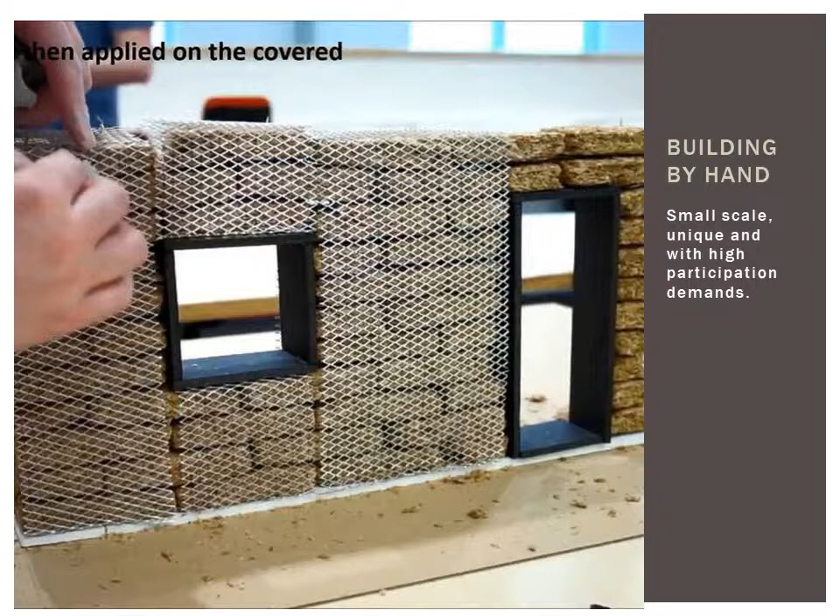Most building in California and in the United States is small custom straw bale homes built by hand. This takes place on a small scale. The buildings are usually unique and with high participation demands from both the owners and the builders. This limits the possibility of spreading straw building into the mainstream market.

One of the big advantages of straw bale construction is that it sequesters a great deal of carbon. It's non-toxic and is thermally quite good, so you get energy efficiency as well as sequestered carbon. So we started looking for new ways to build with straw that would lower the price, gain acceptance with the conventional construction community, and kind of allow us to move into the traditional housing market as well as doing commercial construction.

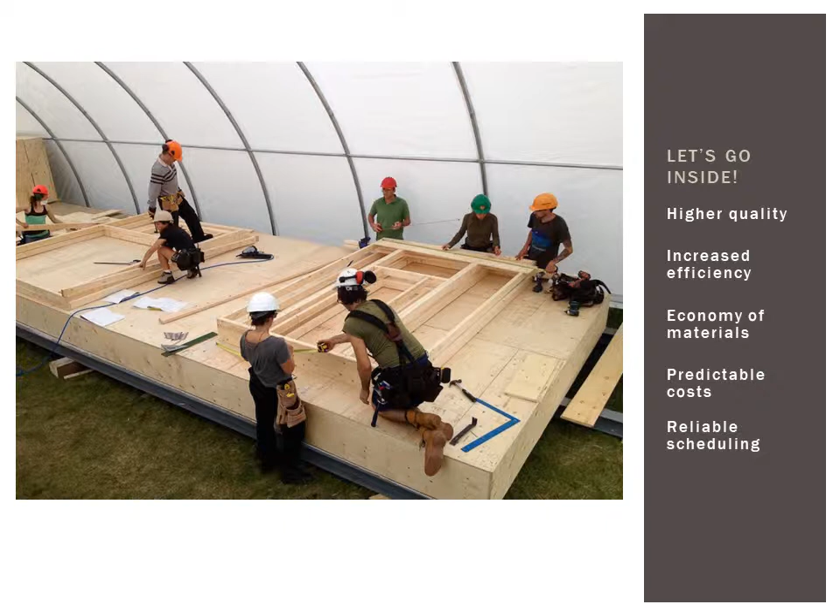Prefabricated building generally results in a lower cost and a consistent higher quality than building unique buildings on site. So he thought, well, let's go inside and build inside. You get higher quality, more efficiency, an economy of materials because you can stack larger quantities of materials and use them over and over again. You can zero in on what the costs are, and because your scheduling is not subject to the demands on the site, including weather, you can have more reliable scheduling.

In addition, the panels can be constructed while the foundation of a project is being put in so that they're all ready for installation as soon as the foundation is ready for them. Chris Magwood up in Canada at the Endeavour Center has used a process that for owner builders is particularly good because it eliminates the need for skilled plastering.

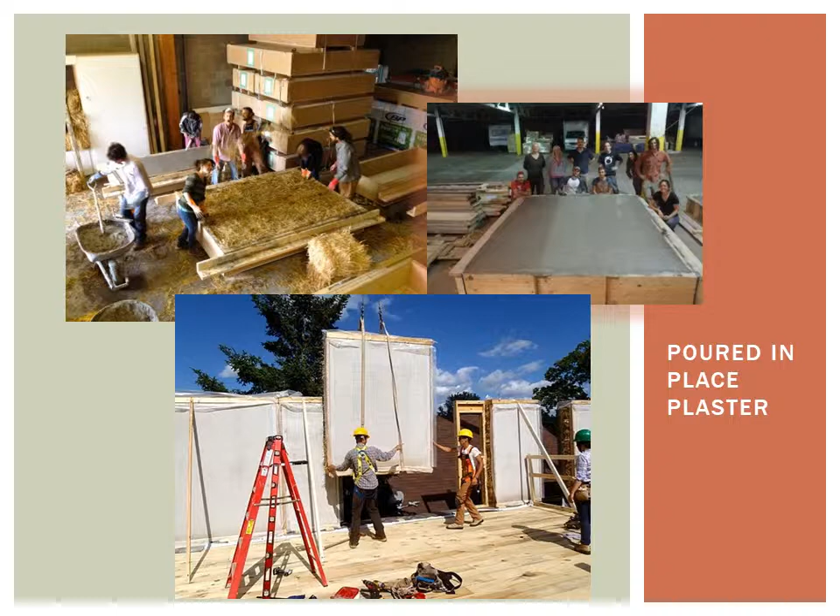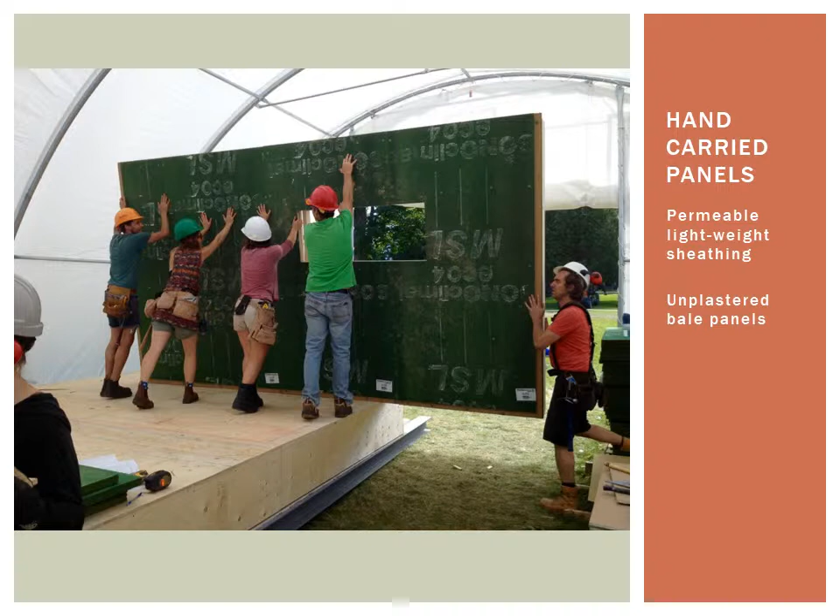In this situation, the bale panels are made and then plaster is floated on top of them and screeded out flat. So it's more like pouring a slab than it is traditional plastering. This, of course, results in pretty heavy panels which have to be lifted in place. The Endeavour Center has also experimented with lighter panels that can be hand placed and moved around on site. Chris Magwood has written an excellent book, Prefab Straw Bale Construction, that goes through a variety of small-scale panel construction methods.

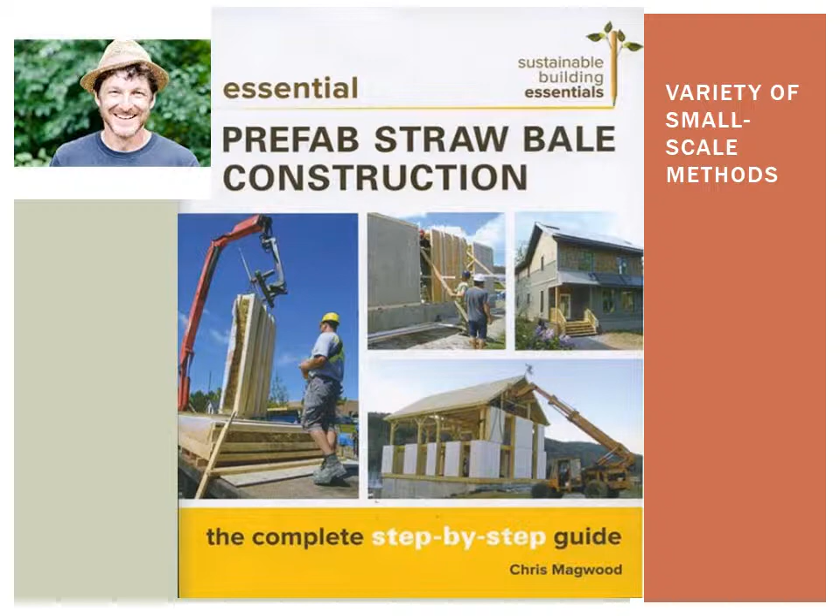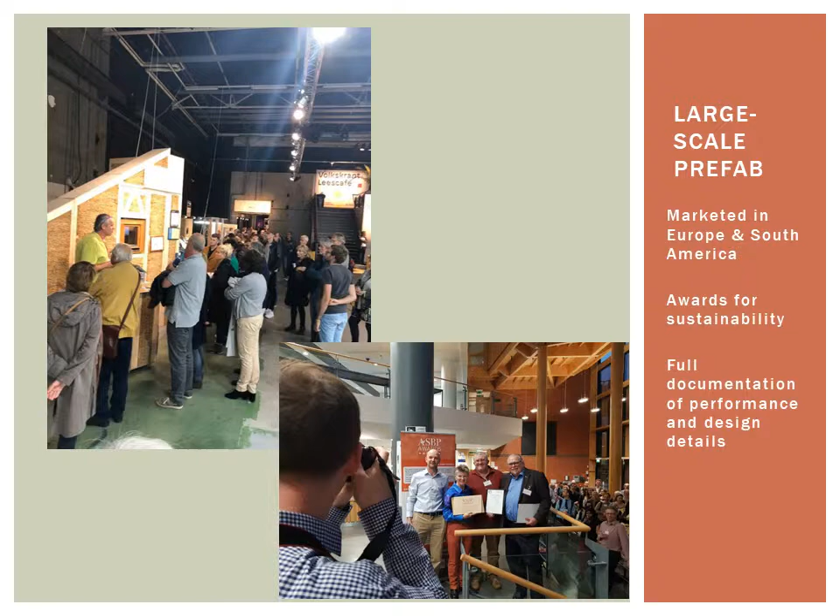In Europe, there are 3 or 4 companies doing large-scale prefab. The first one we're going to discuss is a company called EcoCocon, which is based in Lithuania. They've marketed very successfully all over Europe, and they've won a lot of different awards for environmental and sustainable building. One of their main features is that an architect can submit plans and they will create full documentation, designs with all of the details, and out the other end comes the panel placed.

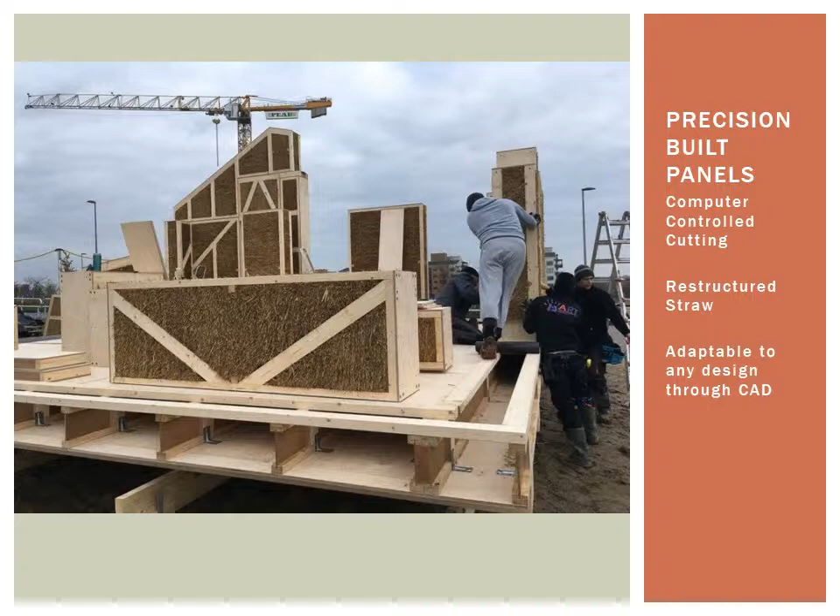They use computer-controlled cutting for their panels, as does ModCell that we'll discuss later, and stuff the panels not with bales, but with kind of loose and restructured straw. With the computer-controlled cutting, the panels themselves can be any shape and are easily varied according to plan. So essentially, you have kit building. They ship packages internationally all over Europe, particularly Germany and Scandinavia. And their structures can be put together by a couple of guys. Most of the panels are small enough that they can be lifted in place, and of course they're not plastered.

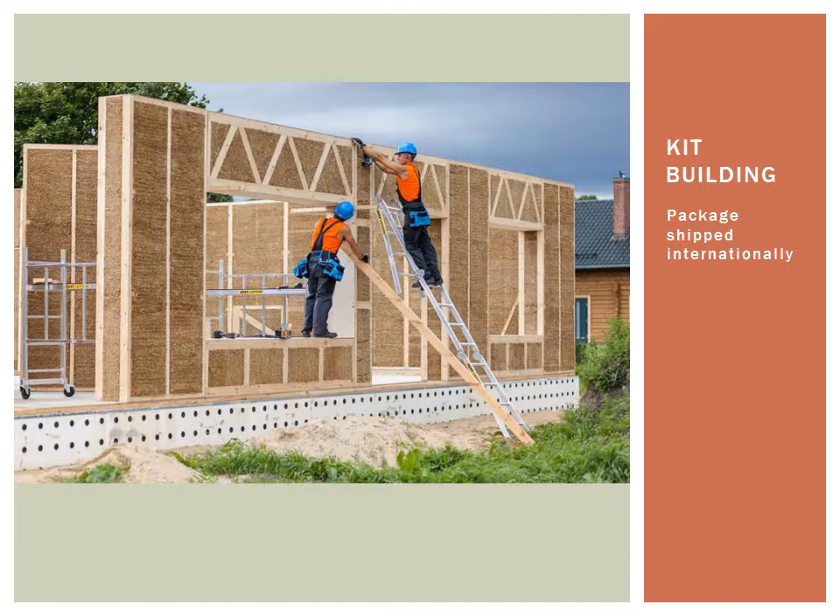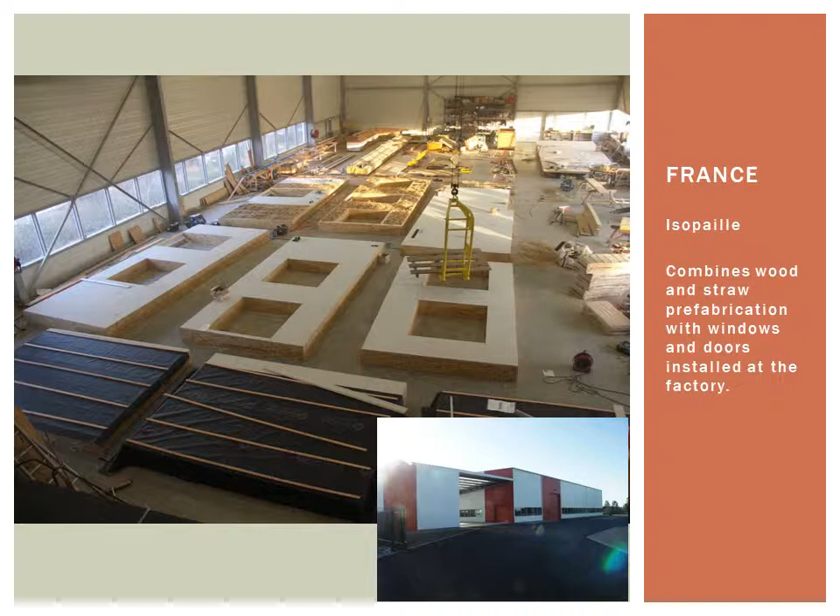There's also a company in France that does panel building, and they combine a lot of wood and straw prefabrication. They put their windows and doors into the panels at the factory.

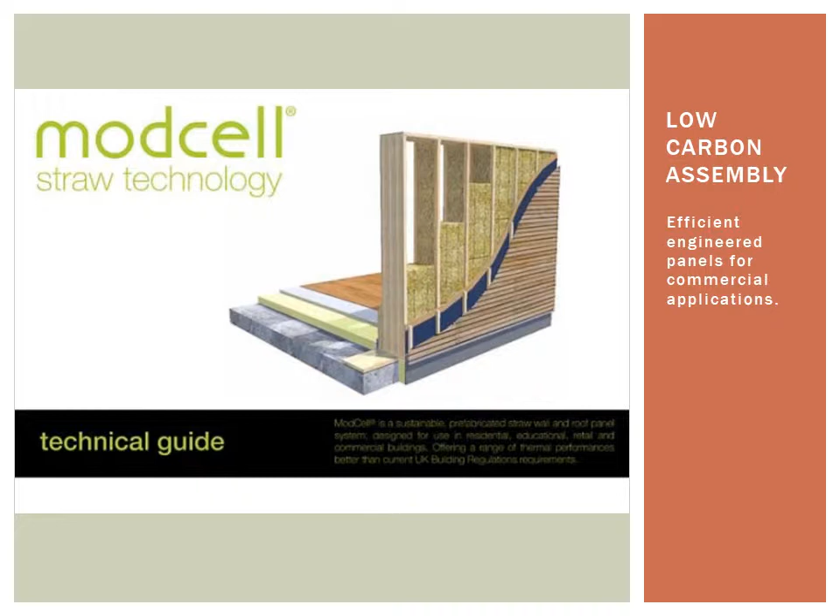ModCell is a company in England who have focused very heavily on carbon sequestration. They have very efficiently engineered panels, and they do a lot of commercial applications, some smaller homes and infill systems as well. They've done a lot of research in how to create a panel that will tie up as much carbon as possible.

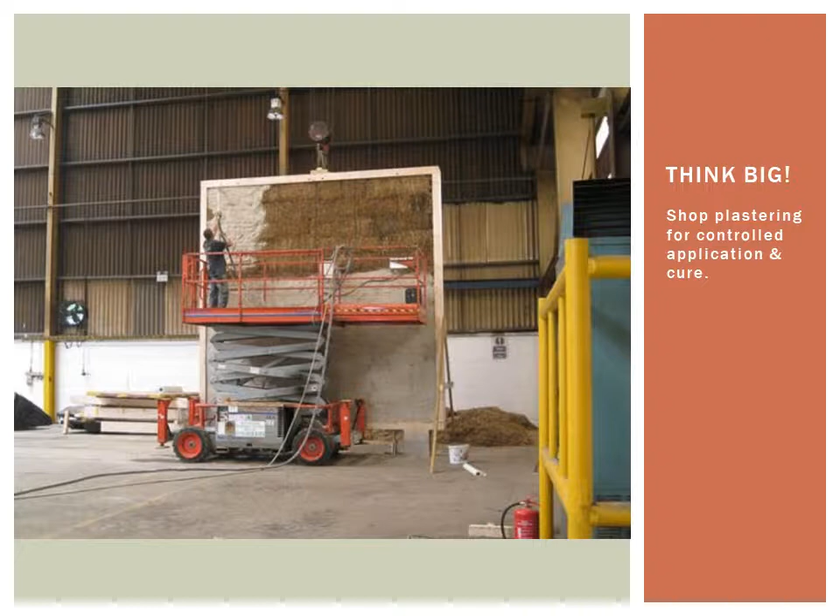They often do very large panels. This is a large panel being plastered in the warehouse. Pre-plastering the panels allows you to apply the plaster in very controlled conditions, application and cure. There are reasons we haven't done this in California that I'll get into later. The panels are put on a truck and brought to the site to be hoisted into place.

They also have what they call flying factories, where they set up a factory near a job. For instance, they did a girls' school. They had a factory near the site where the school was going to be, and the girls got time off of school to come and work in stuffing straw into the panels of their own school.

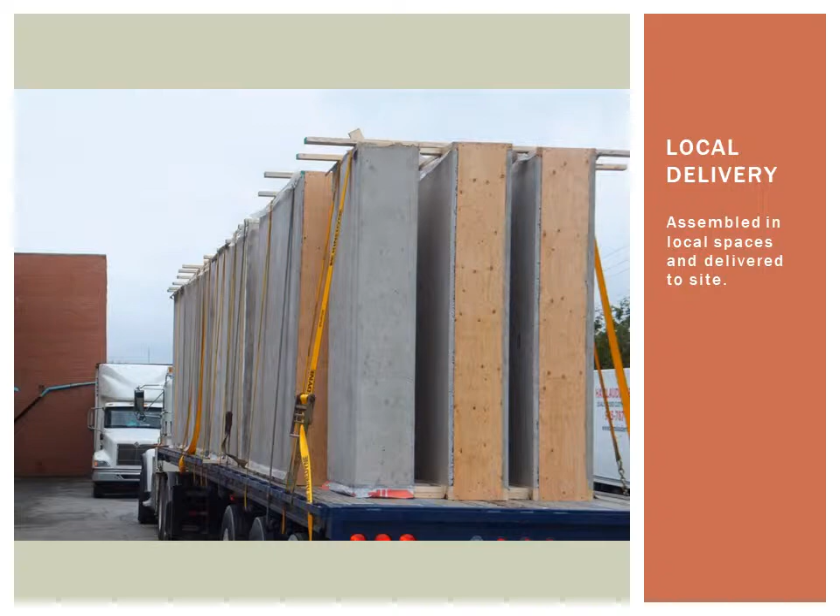Here are a variety of things that they've done. They've done co-housing buildings where they can take advantage of the economy of scale, the guaranteed cost, and also the commitment to sustainable construction. This could also work, for instance, for low-cost housing. Here's a community center done out of straw panels. They do a fair amount of wood siding and so forth. They're not subject to wildfires, most of the places where they are, and wood also sequesters carbon.

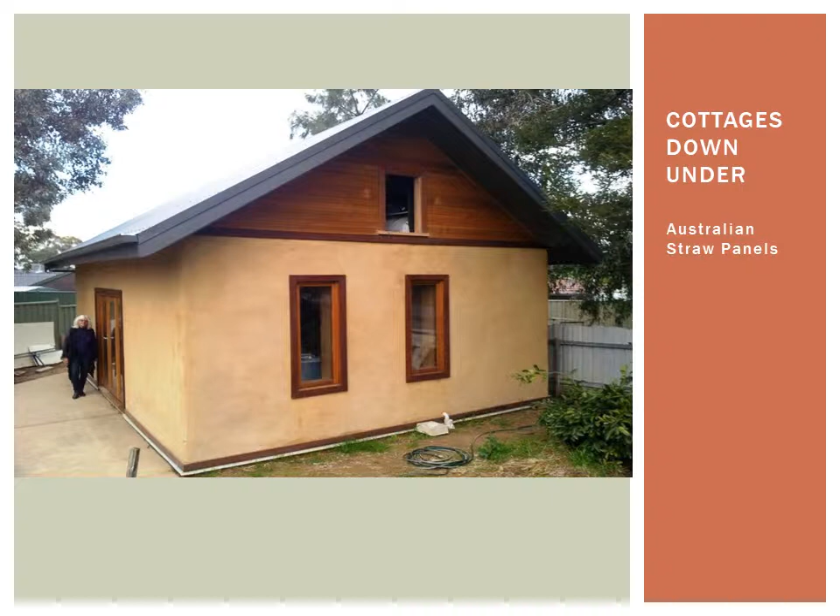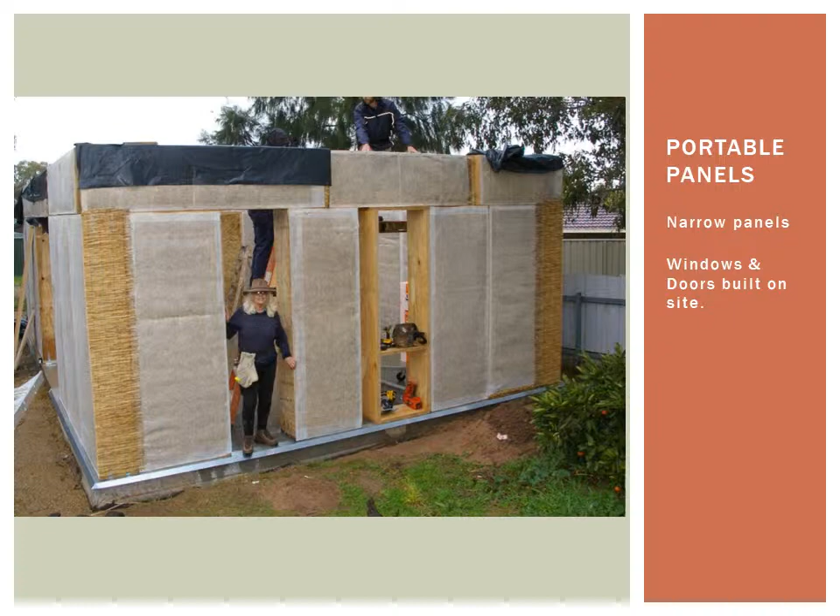Down in Australia, they have been producing panels on a smaller scale for ordinary houses. John and Susan Glassford have been marketing both their plans and their panels to contractors. So basically, if someone commissions a building, they can factory make all of it. They make them small, such that they're easy to load on and off a truck, and people on the job site can hoist them into place themselves. They build them in a small shop by 2 workers. They're easy to transport.

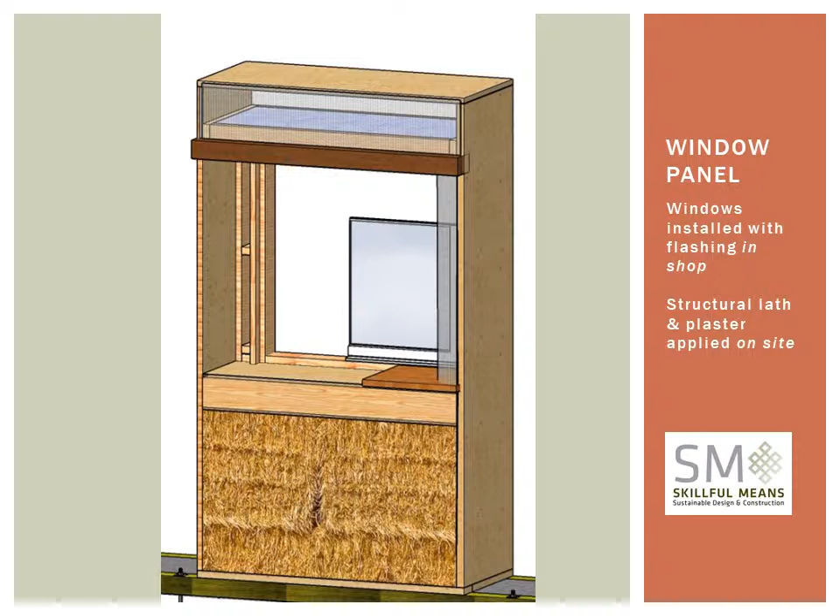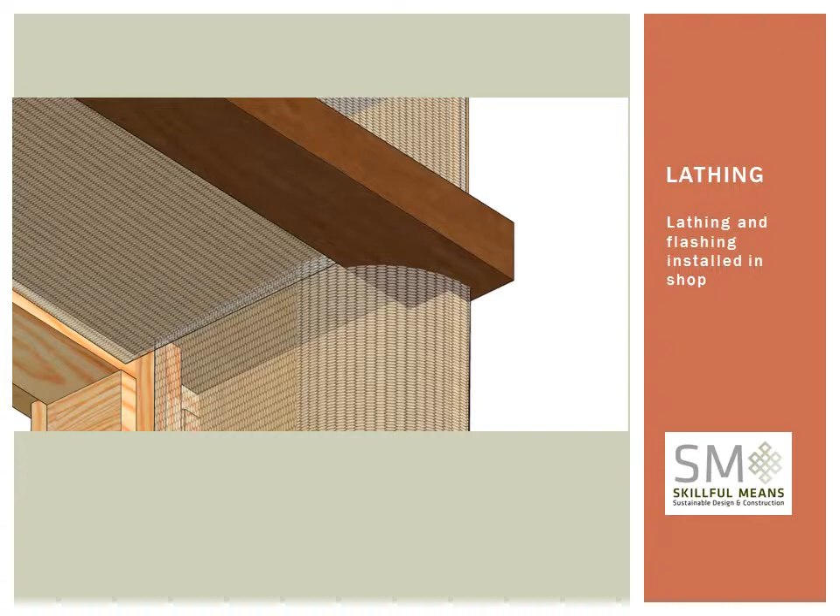Our model, Skillful Means model in California, is similar, except that we prefer the quality control of installing the windows in panels themselves before they go to the job site. This allows more precision in the lathing and also more reliability in the flashing elements, which are so important with a three-dimensional window.

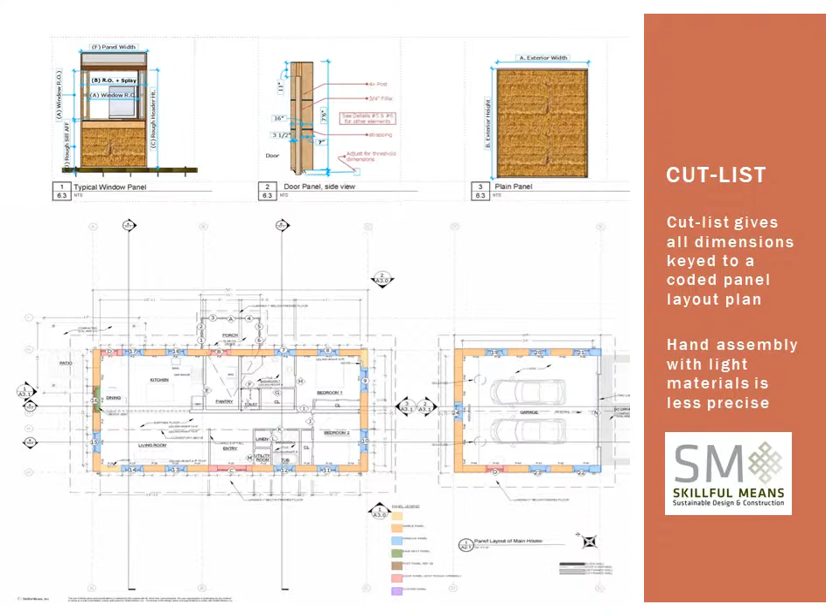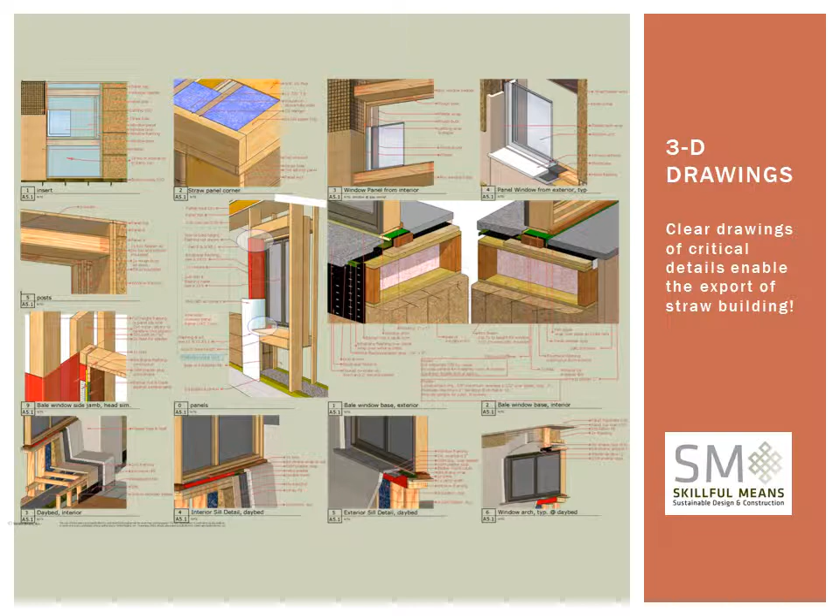We have basic panels: a window panel, a door panel, and a plain panel. They're color-coded on the plans, and then we make a cut list for each, showing the window dimensions and the heights and all of the details. We also include a lot of 3D drawings with our plans to make sure that the elements that are unique to straw bale construction are very clearly communicated, both to owner builders, but also to professional contractors who are not used to this kind of construction.

So the Glassford panels in Australia can be loaded on a truck and sent out to a job site, sometimes far away. They're unloaded with instructions, and then the local crew can begin assembling them.

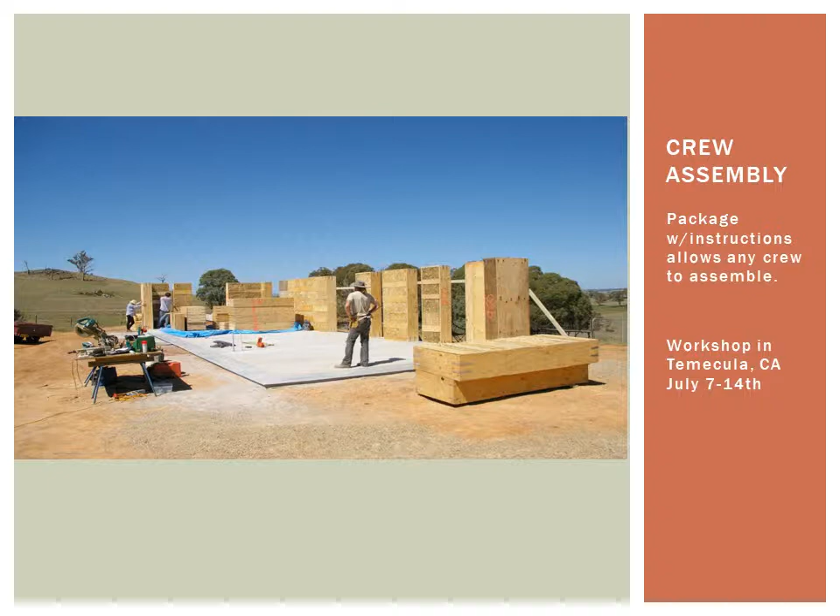There's been a lot of interest in straw bale panel construction, which we continue and support, and hope to see this method of construction spread throughout the West and also throughout America.